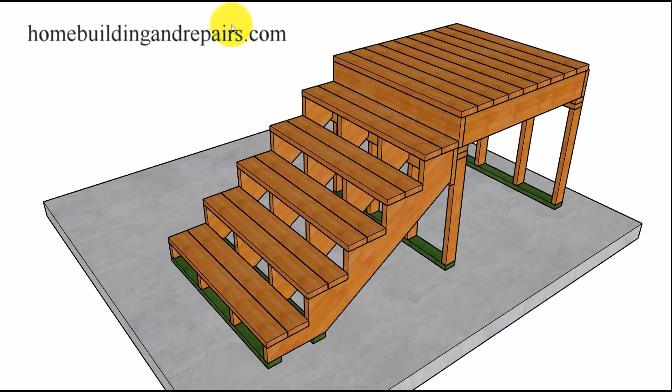In this video, I am going to provide you with a few different ideas for building deck stairs, treads, risers, and some of the connection points and problems you could encounter when building a set of stairs for your deck. So let's go ahead and get started.

This is probably the most popular design, and that would be using two decking boards. And you could do this with all of the man-made manufactured materials instead of wood. But in this case, we're just simply using two 2x6s here. Has an 1/8 of an inch gap in between it. And one of the boards would have to be ripped if you were going to make it 11 inches. But this isn't going to be the case all the time, because sometimes lumber that you get is going to be a little smaller. This would just all depend upon the stairway.

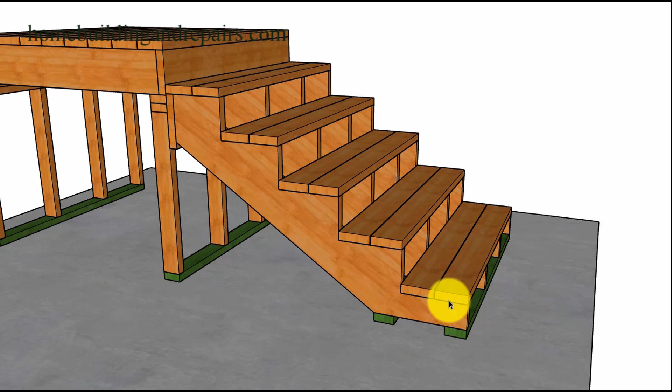So here is our first design. 2x6, no nosing. There's no overhang on this stairway. No 1-inch nosing, which is common. The second most popular stairway for a deck would be using 2x12s. And in some cases 2x10s, but remember the minimum for the depth of a stair tread is going to be 10 inches for residential, 11 inches for public stairways. And again, you'd have to check with your local building department for that information.

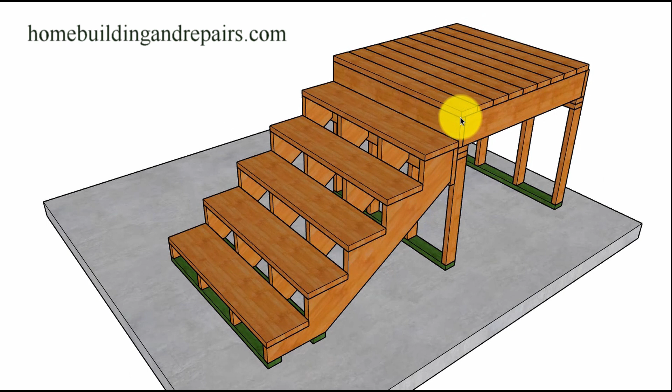Again, this is one you're going to see all over the place. 2x12 treads, maybe leading up to a deck with 2x6. You're rarely going to come to a deck where you're going to have 2x12 decking on it. As a matter of fact, I've never seen one. But I have seen this exact setup right here plenty of times.

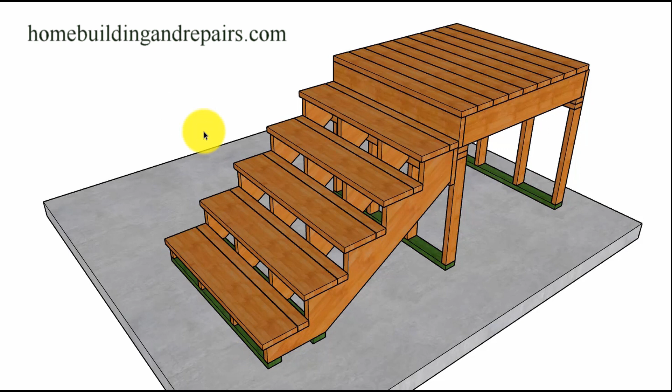In this example, we are using two different boards to create a different design. And again, this isn't a real popular design, but something that you could consider using. A 2x10 and a 2x4. One of these boards will need to be cut or ripped. In this case, I ripped this one here down to 3 inches. So we have a 9.25 inch wide board and then a 3-inch board with the 1/8 of an inch gap in the center. So just another design. Now we do have a nosing on this one.

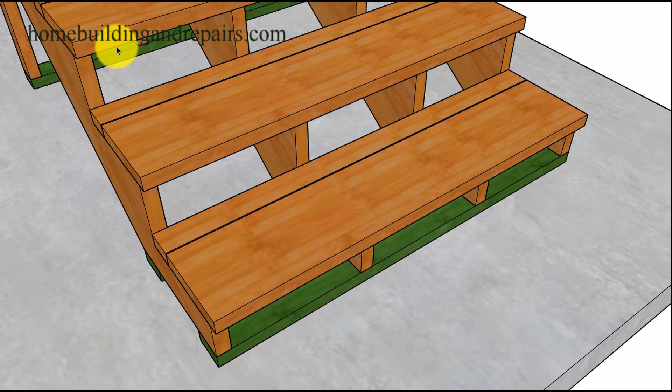And you can see it a little better here. However, we don't have something at the top. And this is common. I see this a lot. You have a 1-inch overhang and you come up to a landing and there is no nosing on it. I cannot tell you how many times I have seen this. That is not going to be acceptable. You need to put the nosing on there. No nosing, nosing. And you can do that by simply moving the decking and laying it out accordingly, or just putting a larger board here. If you made a mistake when you have everything even, just get a larger board if you can.

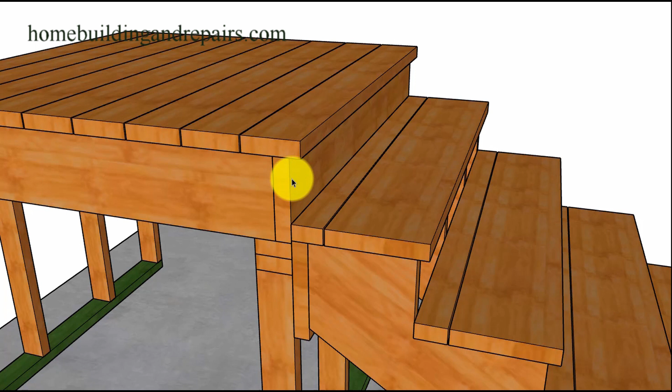I mean, you can really see where something like this is going to become critical if you are using manufactured materials for decking. And you're only dealing with a 5-inch board or a 7-inch board, and you can't get it in a larger board. That could be a problem.

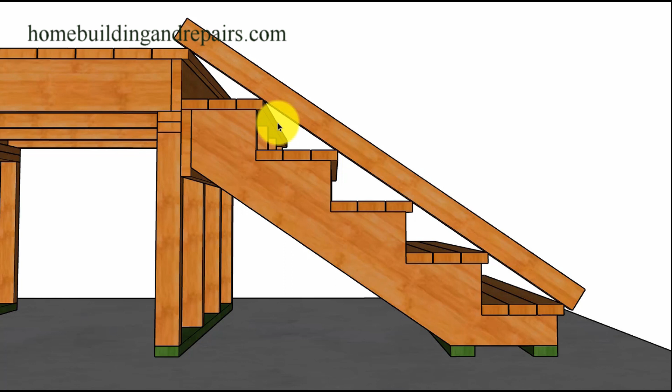Another thing I need to point out, without the nosing, you can see how this would not be straight. And of course, a straight edge might provide you with a better idea what I'm talking about. If you took a straight 2x4 or a level straight edge, set it on top of the stairs, then it should touch each one of the front corners of the treads, or at least be close within an 1/8 of an inch, to have a nice straight and safe stairway.

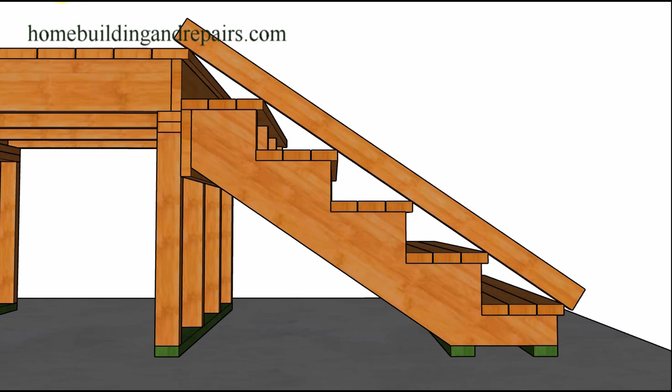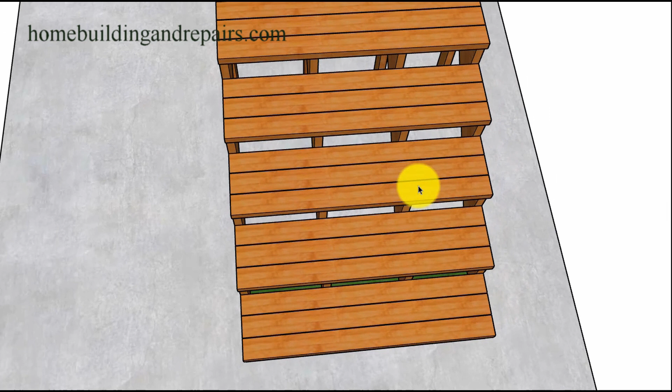So our next design would be 3 boards spaced to create this design. And I think I have 4-inch boards here, maybe 4 1/16 of an inch, to create the 1-inch overhang and the 1/8 of an inch gap that we need for our deck stairs. So another pattern there you can use if you like it.

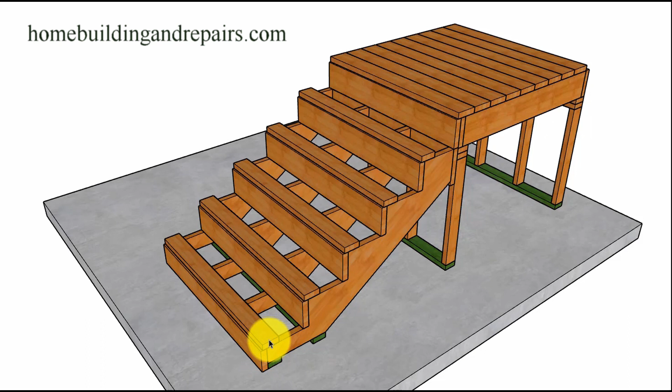Now, before I provide you with some design ideas with risers, I just wanted to point out a couple of problems you could have by simply adding the risers. So in order to do that, I went ahead and left the front tread in its place where it was. So you can see here by adding a 1.5 inch riser, we're going to be getting rid of our nosing. And of course, we might need to readjust our stair tread designs.

And the bottom really isn't going to be as big of a problem. When you add a riser to the front, whatever thickness it's going to be, as long as it's the same, you add a 1.5 inch thick riser to the front and then a 1.5 inch riser to the next one, you're still going to have the same distance here.

We're still going to end up with 11 inches, which would be the same distance that we would have on our stringer. But that isn't going to be the case at the top. We're going to have to add an additional riser, whatever it is, or readjust the stringer. The width here will need to be cut down.

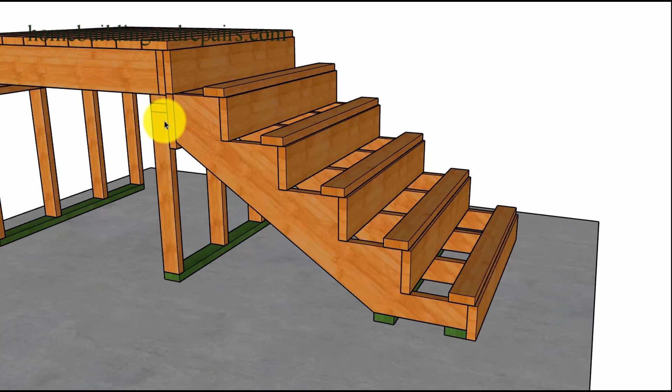So if we didn't add the riser here, but we added the risers to the rest of the stairway, then we're going to have a step. Our upper step here is going to be 1.5 inches longer, which is going to create a problem. So you're going to need to compensate somehow for your risers, either in the stair stringer, the ledger you're going to use, or in the framing of the deck. And don't forget that the nosing on the decking will also be affected by this.

In this example, I went ahead and reduced the length of the stair stringer here. It was 9.5 inches before, reduced it to 8 inches to make everything work. And we have 2x risers, 2x8s that got ripped down to 7.25. We have 7.25 inch risers and 11 inch treads. So the treads would have needed to be 2x12 ripped down to 11 inches, unless you could find some 11 inch lumber.

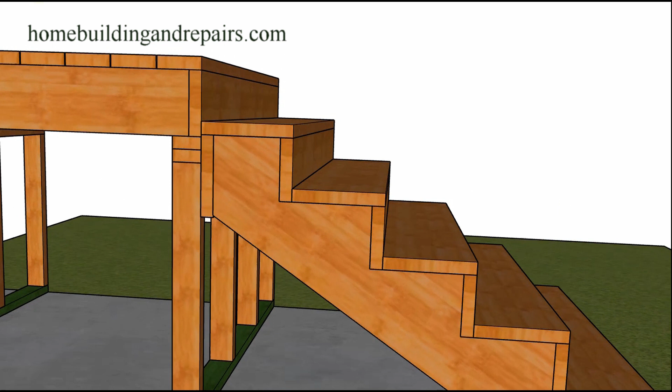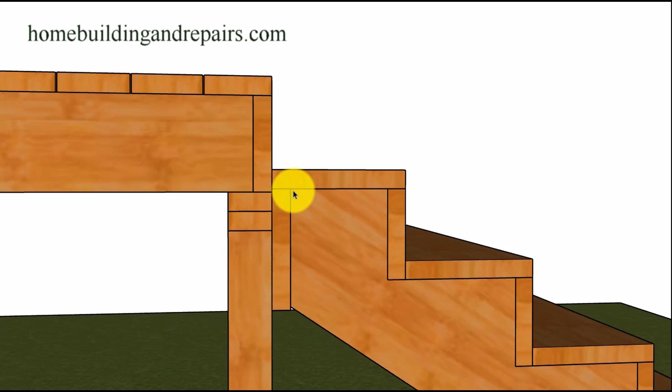And of course here we have everything working out nicely. No nosing on this one here. And this has been adjusted accordingly.

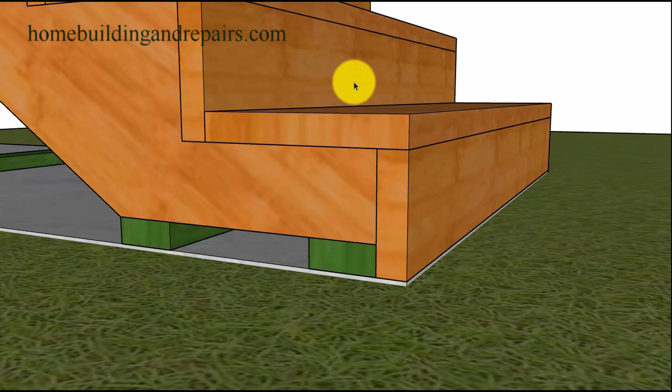Now this is another problem I noticed with deck stairs. Some of the people don't adjust for the soil level or the grass. I've seen deck builders go in and build the deck according to the soil level. And then the homeowner plants grass, and pretty soon they have a 5-inch step here, or it's not even close to the original design. So keep that in mind when you're planning and designing your stairway, because you could always lower or raise the concrete footing if you need to.

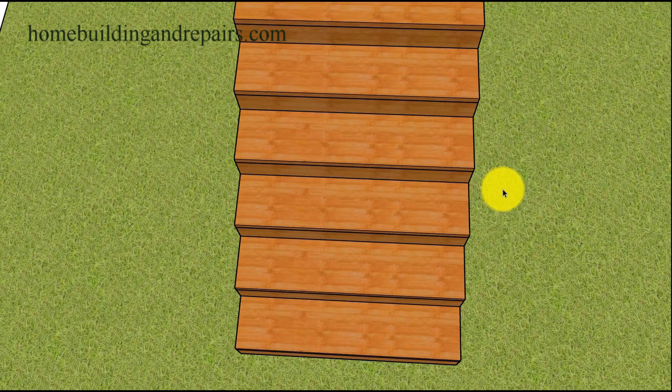And that's what the stairway would look like. And another view of it there. Now here's a design idea I don't see very often, but again, if it works, use it. If you can use a 2x6 for your riser, and it's going to have a gap here, and you're fine with it, go for it. Save a couple dollars on lumber, and if you're going to put a skirt board on the side of it, you would never even see it. So just again, another idea.

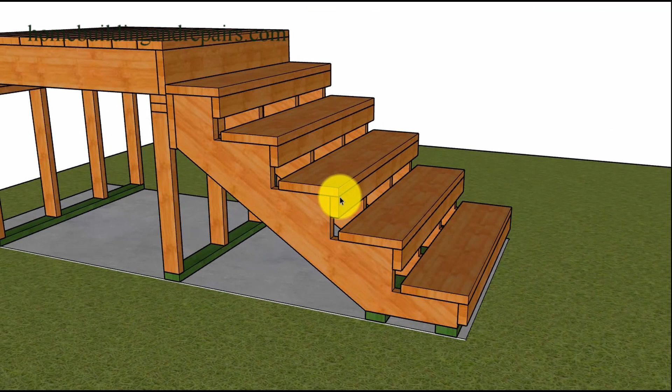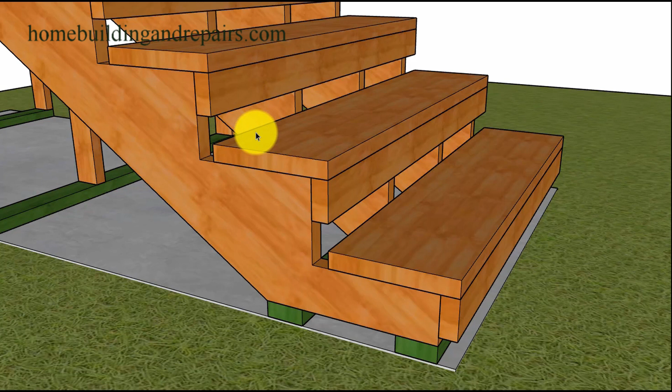Next up on the list, instead of a 2x6, you could use a 2x4, as long as the distance here is less than 4 inches. Remember, most building codes will not allow a stairway or the handrail, guardrail system to allow a 4-inch round sphere or ball, basically, to slide through any part of the stairway. So you'd have to check with your local building authorities to verify that information. So just another idea.

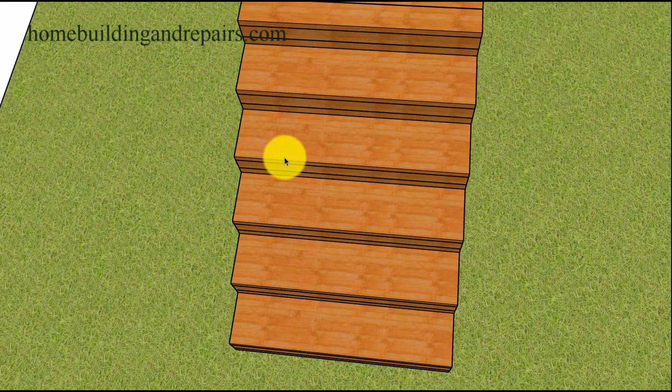Now, if you didn't like that idea, maybe you'll like this one here. We'll use a couple of 2x4s for our risers. And if you're using construction standard lumber, this might not be a problem. The manufactured lumber, engineered man-made materials, might be a problem, as I mentioned earlier. So 2x4s, 7.25 inch riser should work out nicely. 3.5 inches, an 1/8 of an inch gap, 3.5 inches, 1/8 of an inch gap, and you are in business.

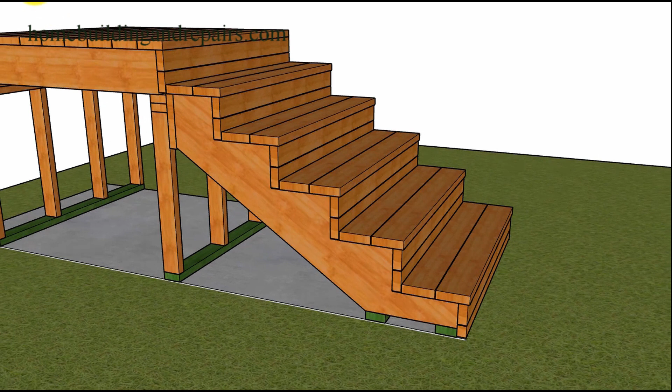In our last example, we are going to keep the risers, use the two 2x4s, and then switch the treads to a couple of 2x6s. And what I did here was I just went ahead for the 11 inches. Two 2x6s are going to give you 11 inches. If we add an 1/8 of an inch gap and an 1/8 of an inch gap, we're going to come out with 11 1/4 inches. So I just left the 1/4 inch nosing sticking out. Just another idea, an option if you don't want to rip the lumber down.

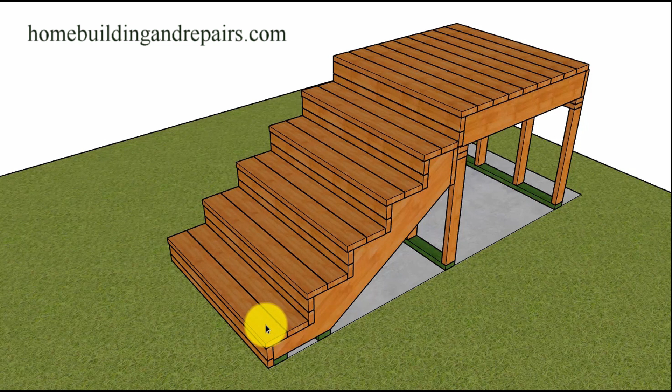Now, if you're using pressure treated lumber, you're probably not going to want to rip it down because you're going to have a side that would need to be treated, or you could put it up against the back of the tread if you don't want to see it. This idea right here might actually work better for pressure treated lumber, or even the man-made decking where you don't want to cut it and mess up the design if it has a certain amount of grooves or whatever the design is in the step. And of course, whatever the overhang is here, if it's 1/4 of an inch, 1/2 inch, make sure that you match it above.

So that's it for the video.